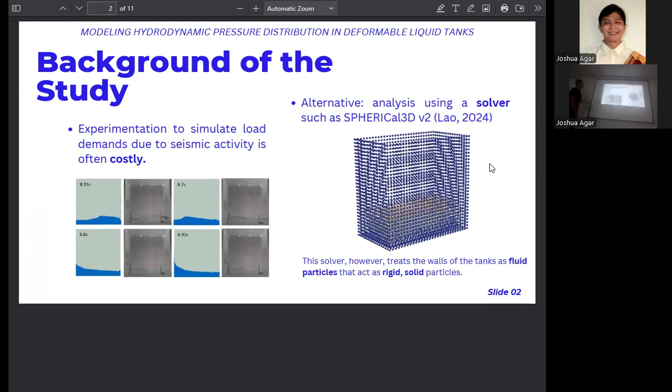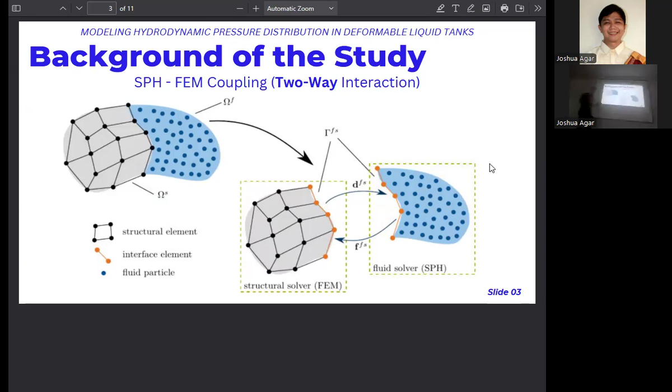Next slide. My problem statement now is to try to implement a coupled SPH-FEM method, combining the two methods in order to compute the hydrodynamic pressure. Comparing to the previous study, there was no tank deformation—it was only a one-way interaction, where the fluid impacts the boundary but the boundary does not impact back. So my framework now involves a two-way process in which both elements interact.

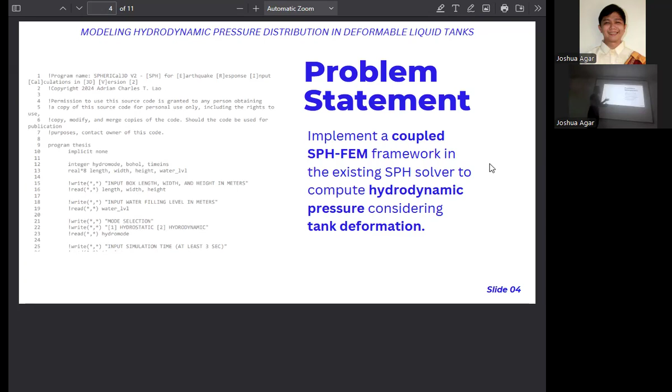What I've modified compared to the previous meeting—last presentation had many objectives, but I distilled it into 3 main objectives. First is to develop a coupling mechanism to find an efficient way for SPH and FEM to interact. Second, once that's coded, I will validate the results using the same experimental data used before. Finally, after validation, I'll try to simulate sloshing in rectangular tanks. So I'll be limiting my study to rectangular tanks—I remember last time I included cylindrical tanks, but this time I decided on only rectangular tanks.

Next slide. Significance, of course, includes better tank design and safety assessment.

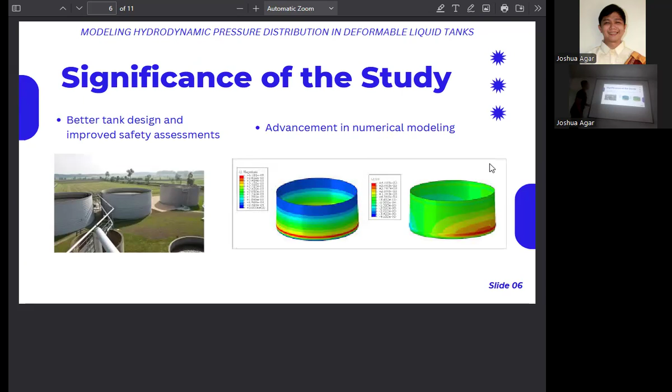Next, I also modified my conceptual framework. I've added the coupling mechanism, which is an important part of the entire research study. The one highlighted in yellow is what's actually in the research, and the ones shaded in white are other concepts that are unrelated.

So, mesh-based approach will be used for the solid model, that's for the boundary of the tank. The liquid model will use SPH—that's a blunder, it's supposed to be mesh-free. Anyway, I'm going to focus on a coupling mechanism that involves two-way coupling instead of one-way coupling, which was done in the previous research.

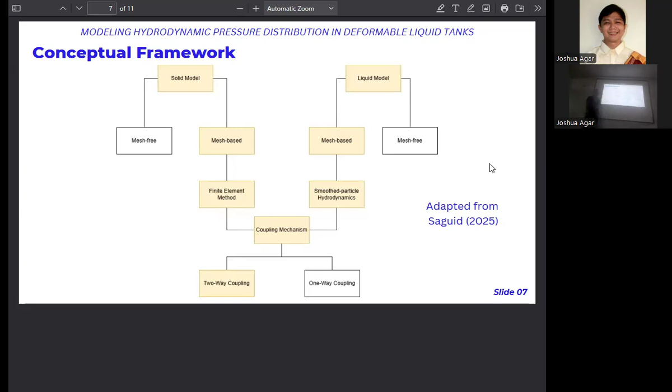Scope and limitations: I'll be using ANSYS for FEM. For SPH, I'll just be using the code by the previous researcher, Engineer Lao, and doing some modifications to allow ANSYS to work alongside that code, making the coupling mechanism possible. And as I said earlier, it's only for rectangular tanks, and in addition, we're just going to work with water, not other liquids, for the liquid storage. For review of related literature, not too much has been added.

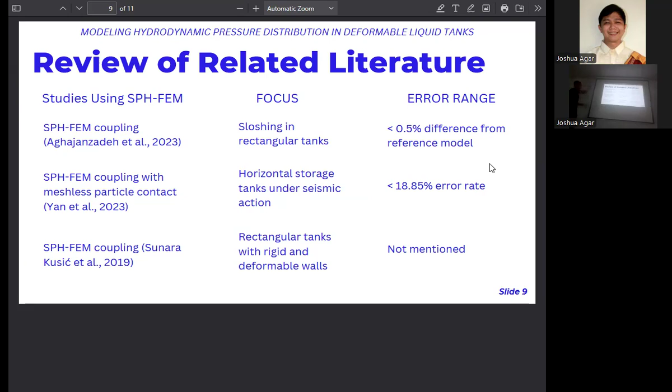What I did throughout these past weeks was sort of just distill all of that, what was contained. Next slide.

Thank you, Mr. Agar, for that presentation. Now you're in the hot seat, so if you have questions, feel free to raise them. It's actually highly recommended for you to compare notes on how it's presented compared to how we will present, so at least we have an idea how to present or make an effective presentation. For the Q&A portion, we'll have around 6 minutes. Fortunately, we don't have that issue much, the senior faculty, I'm just slightly sick.

Let's begin by having your audience appreciate the research objectives. What I would recommend for your presentation is to include what is sloshing. If we roll back a few slides to your objectives, you might as well relegate this to the left-hand side, with the photos on the right to illustrate what the copy is about.

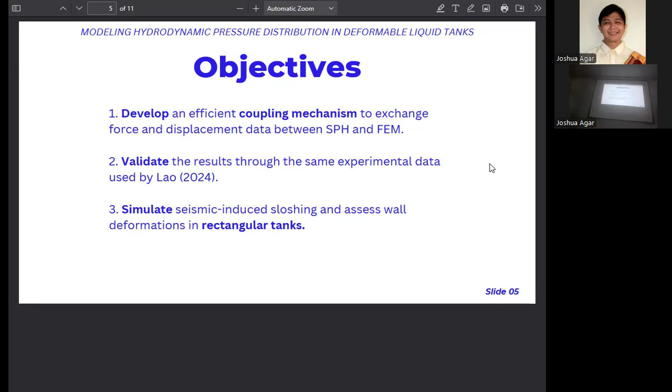And my main worry for you is this part, when doing your scope and limitation. You have two different software - you have SPHERICal3D which runs basically on Fortran, but ANSYS and LS-DYNA are essentially closed form software, closed source, you can't access the code. Have you already explored provisions within ANSYS where you can make your own solver?

I've tried searching some FEM software in such a way that it's possible to call the software from the SPH. SPH will first generate values - that will be the input for the FEM, and in response, that will be the output.

So, are you talking about an API? I'm not sure, I'm not very familiar with the terminology, but it's sort of like two-way, they are able to interact.

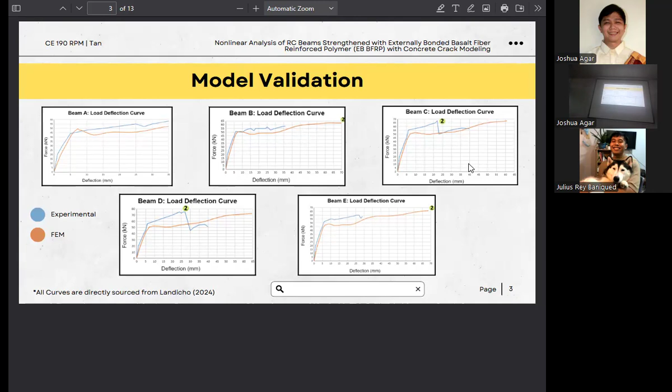He actually used experimental values that he searched from a source and used his own FEM software as comparison. As you can see here, in the elastic region he basically captured the experimental values, but when it comes to plastic behavior it doesn't quite merge. In the experimental data it dropped here, most likely because cracks form and the failure is sudden. He didn't consider that and only considered plastic deformations, which he also included in his scope and limitation.

Next slide. In relation to that, I'm going to introduce the concrete crack modeling to bridge that gap, using his elastic region and connecting this non-plastic region, so that together his study and my study can both validate the one he used as validation.

Next slide. So here are my objectives - first, obviously, is to continue the study of Engineer Landicho.

Next is to determine the crack initiation and propagation and the fracture patterns on a 4-point loading test, and determine how the shear span to depth ratio of the beam affects the cracking results and the cracking patterns. So I will be using that and validating it against the results of Engineer Landicho and the one he used to validate his own as well.

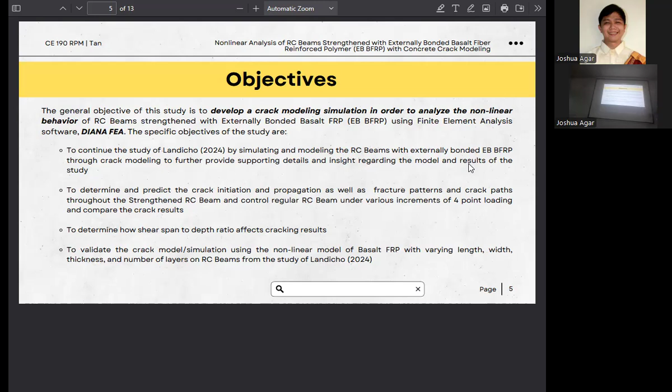So the significance of the study, obviously, we don't need to waste more materials in experimental tests. It also helps determine the optimal placement of the BFRP sheets based on the crack propagation and crack path. And it helps anticipate where the beams actually fail, which is critical so that we can take preventive measures.

So the scope and limitation is I plan to actually use discrete crack modeling approach instead of the smeared one, because discrete crack modeling basically answers all my objectives for the crack patterns and crack paths, instead of smeared, where it just gives me a distribution of the stresses.

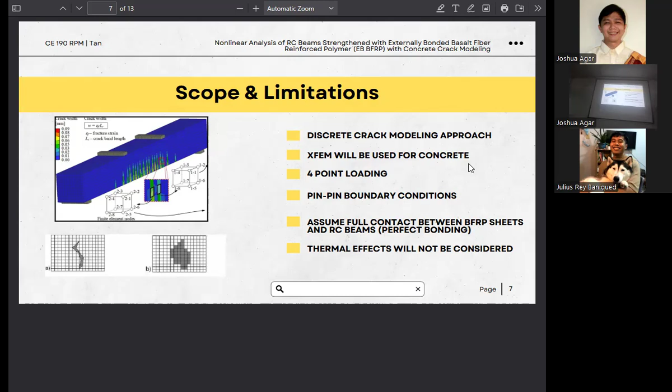So I plan to use extended XFEM for the concrete itself, and I will use 4-point loading. I assume that I will still be using pin-pin boundary, and I will also assume that the bond between the BFRP and the concrete is perfect, so the failure mechanism will not be debonding. I will also not consider thermal effects.

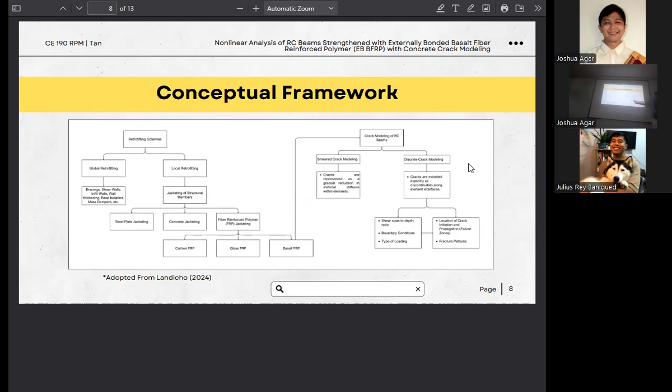And for the conceptual framework, basically this is adopted from Engineer Landicho, and I will be modeling it using discrete crack modeling, and I will be changing these parameters, most likely the shear span to depth ratio, but keeping others constant to change the location of the crack and the fracture.

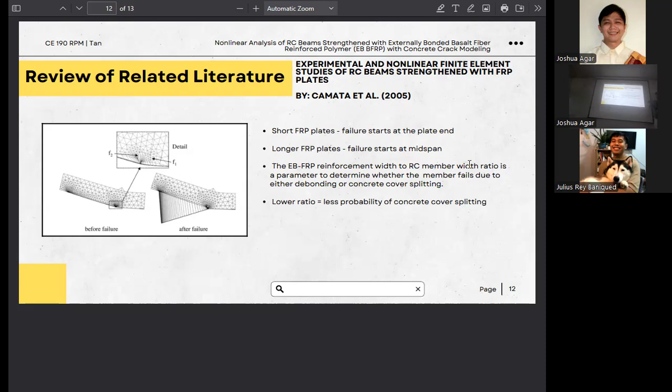And lastly, this one basically states that a lower width of the sheet relative to the RC member lessens the possibility of concrete cover splitting. So I will try, as much as possible, to lower this so that the failure mode won't be debonding, since I assume that debonding failure is not a failure mechanism in my study. So that's it, these are my list of references.

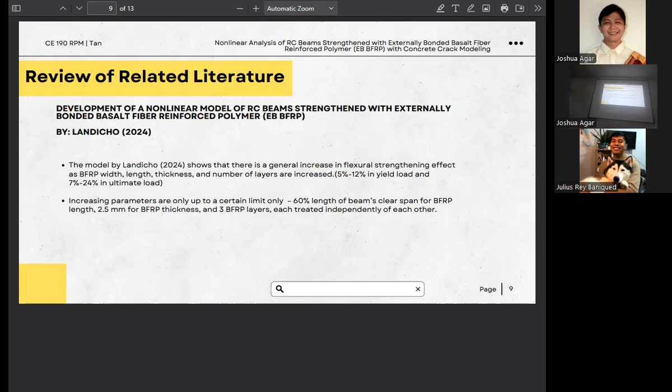Good day everyone, my name is Joshua Agar, and this is my report on my study: the prediction of net pressure coefficients on low-rise gable roofs with single dominant opening using artificial neural networks. My advisors are Sir Carlo Coleria and Sir...

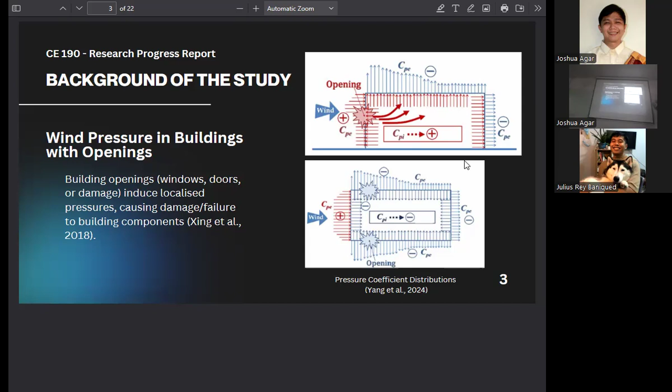So this is what we'll be going through with my presentation: background of the study, why. Building openings induce localized pressures, caused by the interaction of external and internal wind pressures, or simply put, net pressure, which cause damage and or failure to vulnerable building components.

In summary, CFDs and wind tunnels, the traditional methods, have already covered external and internal pressures. When it comes to ANNs, external pressures take focus.

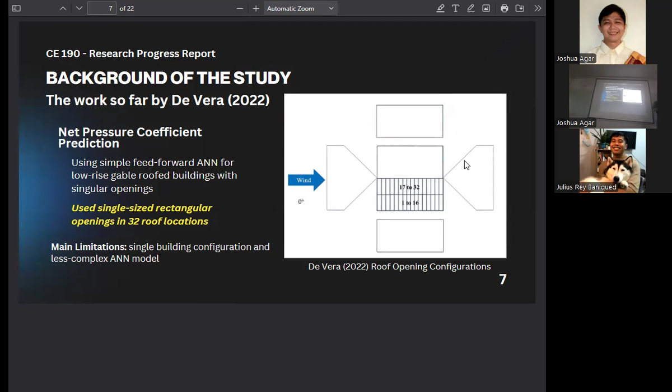This is where my predecessor came in, making use of simple feed-forward ANNs to predict net pressure coefficients using single-size rectangular openings in 32 roofing locations. However, what is not included in the scope is the variation in opening geometry.

Yes, he was able to account for the variation in location. However, studies show that internal wind pressure is not only affected by its location, but also its geometry, or rather its shape and size.

So this is where the problem statement comes in: current research on the application of ANNs in predicting net wind pressure coefficients is already proved to be a viable option, however current researchers have yet to consider the variety in geometry.

In order to address this, I plan on developing a new ANN model to predict the net wind pressure on low-rise gable roofs over varying roof slopes and opening types.

To achieve this: one, first obtain wind pressure data using CFD simulations; two, determine the best ANN architecture; and three, assess its performance by comparing it with literature.

If successful, we should have a more generalized model for net pressure coefficient prediction. Moreover, it becomes an accessible method for predicting wind loads, and it could also serve as an aid in preliminary structural design and DRRM strategies.

For the scope and limitations, I will also be adapting it from De Vera's study, wherein he limited his analysis to isolated low-rise gable roofs, and wherein building flexibility and leakages are neglected. Moreover, for CFD simulations, I will be making use of literature to validate its data.

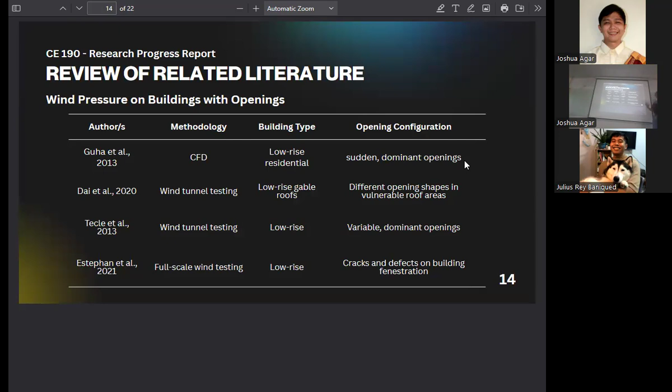Just a quick rundown of their findings: single dominant openings produce coefficients ranging from 0.69 to 0.98. They also observed significant transient overshoots, and that some design codes are found to be underestimating the internal pressures.

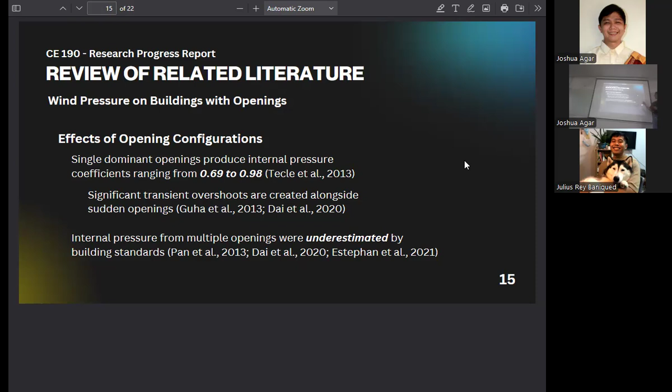Lastly, for the application of ANNs, I have listed them earlier, but mostly they make use of different types, also varying input variables and output. As I said, mostly focused on mean or external, whereas De Vera's is net. And of course their performance shows that ANNs are reliable or viable in predicting such pressures.

Let's skip that for now. And those are my references, and thank you very much for listening.

Thank you, Josh, for that presentation. Perhaps I would like to ask the audience if may tanong, kasi somehow I'm barred from commenting dahil ako po yung adviser. Wala? Sige, pero ito tayo sa slide mo, nagagamit niya yung CFD.

Nagagawa na yung lahat.

Why do we need to do it? I see. So basically, what is the purpose of the ANN? The motivation, even from previous researches, is the speed. Now, I'm not saying it's bad to use CFDs or wind tunnel testing, but we're looking into the application of those results, the application of experimental data into further usage. So that is where ANNs come in.

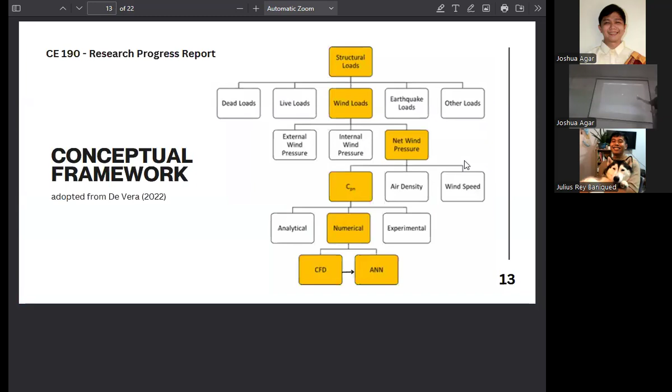Or rather, in the review of related literature, I expect it to perform similarly to de Vera's since we have a similar, what do you call it, training data set. So I would say probably around the higher 0.9 regions, but I still can't give a specific number for now. But given the performance of other studies, we can expect it to be as high as this.

As for his final question: what are the scopes and limitations? Maybe I'll try to expound on that too.

You should already work on that because it's part of, in relation to the second question. And after your midterm presentation, when you derive or devise your methodology, you should already identify the scope - what will be the increments of your shape, what will be the increments of sizes, aspect ratios that you need to consider so we can know whether the research is feasible or not. So that's what's being asked of you. So far, what do you think will be the scope and limitations of your study?

For now, what's written in my presentation is what I have considered. So I will still discuss the specifics of it with Sir Carlo in our upcoming meetings.

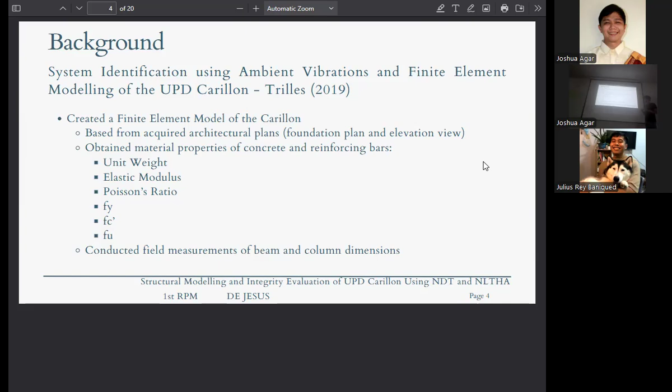So these are basically the findings of his research. Afterwards, he created dynamic testing on the tower, where he laid out accelerometers which measure the frequencies of the tower, basically ambient and free responses. He also used various modal analysis methods like peak picking, FDD, and others. He later finally tuned this model to adjust certain parameters.

The next following research involves Mr. Lamparas, where he created an integrity evaluation of the tower specifically using NLTHA.

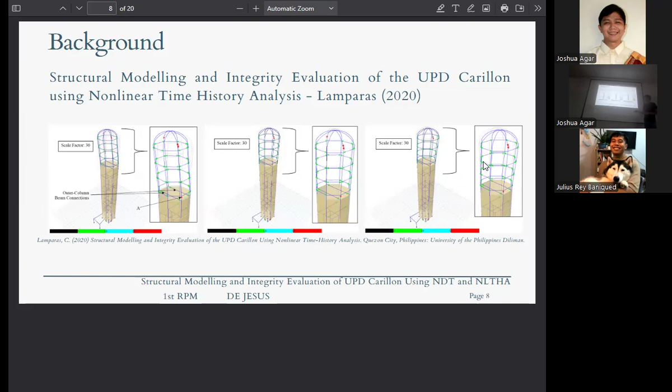These were the findings. Basically, after the simulations, plastic hinge formations formed in the tower after earthquakes. So these researchers were both successful, yet because of the complications, there are still recommendations by them for further research.

So let me enumerate them. Specifically, they mentioned the use of non-destructive testing, which can help in structural modeling. So in my case, my goal is now to continue the research and apply this missing concept.

So the same problem statement still stands, because the tower, carried as an aging structure, needs a reevaluation of structural integrity to determine potentially damaging threats. With this problem, I created this main objective, and I have enumerated some objectives to answer.

First is to apply non-destructive test methods. Second, to reperform the nonlinear time history analysis and earthquake simulations, similar to Lamparas' figures, and compare these newly obtained results to the previous findings of this past research.

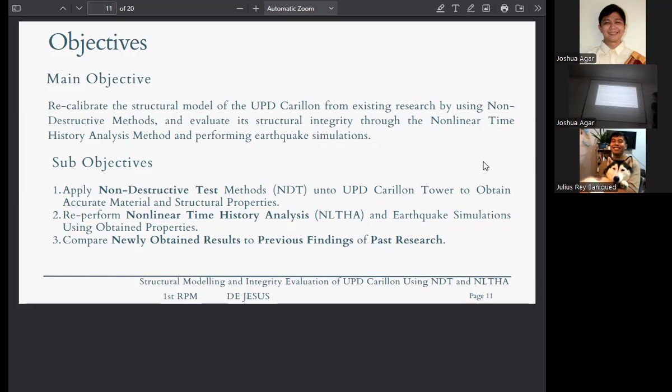For the significance, this research is important so that it can help detect potential risks, and in the event of future earthquakes, it is necessary to determine the system response. Also, by continuing this research by Trilles and Lamparas, you can help develop a framework in promoting structural health monitoring in different groups. In fact, in UPLB there's also a similar structure. Also, by performing NDT, it can help determine actual material properties.

For the scope and limitations, the only thing that I will add and explore is adding non-destructive testing methods. I will still use the finite element model created by Mr. Trilles and use similar computations to Lamparas.

For the conceptual framework, I have based this on the previous studies, but I still highlighted these three concepts and added more on non-destructive testing methods that I could have possibly researched so far.

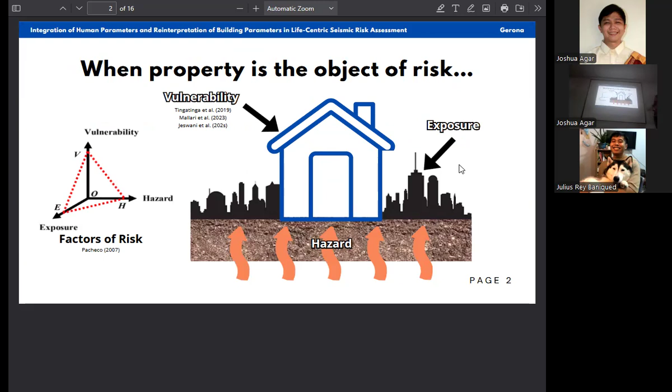So risk is the product of three factors: exposure, hazard, and vulnerability. When property is the object of risk, the characteristics of the property, or in this case the structure, is the vulnerability. But when life is the object of risk, life is the vulnerability, and the building becomes a hazard.

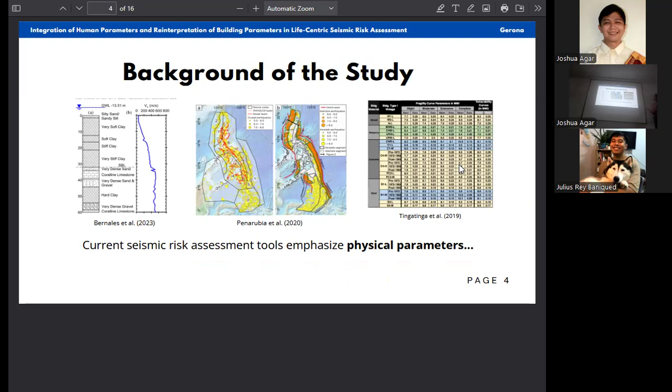Current seismic risk assessment tools emphasize physical parameters such as the soil type, the placement of the faults, and even the building parameters—wood, materials, the structure type, the height of the stories—and the estimation of potential economic losses, which are in this case cost and time.

The identified problem with this is that current seismic assessments focus on physical and economic losses instead of the impact on life, inducing disaster inequity or injustice, which affects vulnerability.

The points to support this are the incorporation, or secondary consideration, of social vulnerability parameters—the literature supports that. Another point is the consideration of the building parameters as vulnerabilities instead of hazards. And then the importance of governance and justice

in economic assessments of risk, since when the assessments of risk are focused on the economic side, such as cost, then it will favor high-value residential areas. So those are not the sectors that are needing support after disasters.

So the general objective of this proposal is to develop a tool to estimate seismic risk on life. The specific objectives are going to answer the supporting arguments of the problem.

So this considers social vulnerability parameters in the assessment. Another is to redefine the building parameters, which are initially vulnerability parameters, and to analyze the effect of prioritizing—changing the objective of risk from property to life. How will it affect the assessment?

So this study aims to contribute to disaster risk reduction management projects with the emphasis on vulnerable sectors.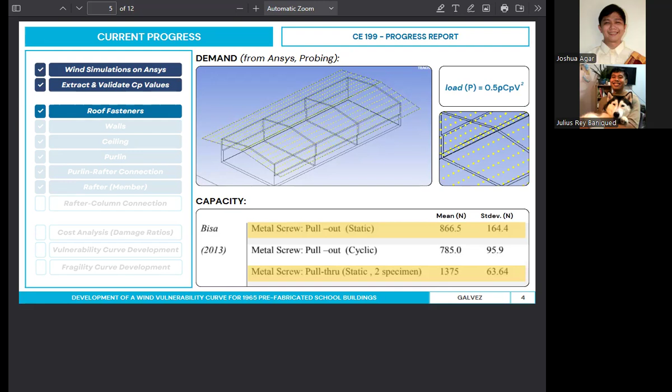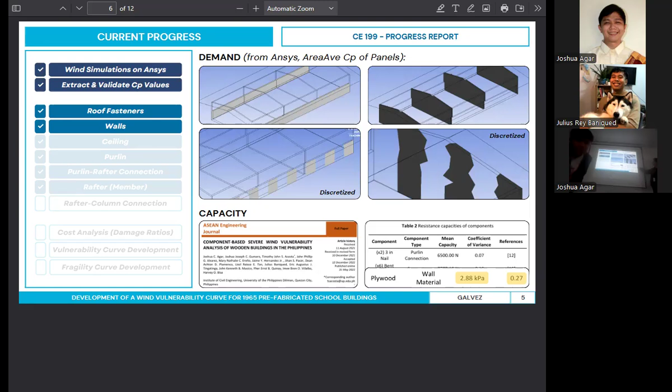And then set up ako ng Zoom. And then next slide, so for wall demand, same principle lang din. So using ANSYS, nag-set tayo ng discretized walls. So dito sa mga area na to, kukuha ng mga CP values, so area average, sa mean and standard deviation na randomly generated using Excel. So, mean versus capacity, so comes there.

And then for ceilings naman po, so same principle, next slide. Same principle lang din as well. So, bale, for each discretized panel, kukuha ng area average value, with two load which are randomly generated using mean and standard deviation. So, moving on to next slide.

So, ngayon naman, for the beams, mas nag-focus tayo on using ETABS. So, bale sa beams, kumuha tayo ng mga area average CP value throughout the envelope ng ating structure. So, from area average, kinonvert natin to CP, kinonvert natin to load. So, area loads na po yun. And then, parang kinonvert po natin siya to line load.

So, based on tributary width. So, yun yung parang naman sa roof. Para naman sa walls mismo, pwede naman siya wall na lang. So, the reason why we did that is parang my advisor and I found it na mas accurate kasi sa panel na lang din nasa room. So, ganyan siya. Although it's a bit longer, it's a bit more accurate daw po.

So, as per that, yung demand, since nakalatag na yung mismong load, makakapag-extract na tayo ng mga internal forces within the member. So, shear, moment, flexure action, ganon. So, makakapag-extract na tayo. And compare na natin sa mean standard deviation based on Monte Carlo.

So, next slide. As for screw fastener connection, so same principle lang din po, using same structure, same loads, nakalatag na. Extract na lang tayo ng demand from ETABS, so P which is axial, and then V2 which is shear. And then compare natin sa pull-out capacity na galing sa research paper. Then yung shear tensile combined action and shear, galing naman siya sa AISC concept.

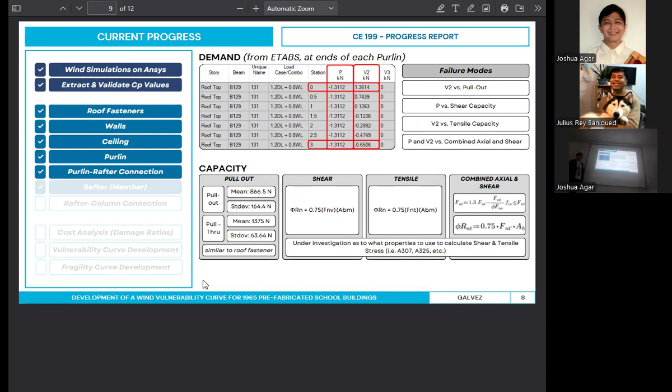Siguro in relation to that, part of fragility curves is identifying yung damage states. How are you planning to identify yung overall building damage state? What you only have in the case definition is yung per component. Sinabi mo na roof, wall, window, may separate silang damage rate, parang damage state, pero you want to identify na isa lang, unified for the whole building. So nabring up na po siya sa akin how do I plan for overall building. At may recommend po sa akin ng previous study, may damage state definitions siyang nahanap para sa overarching building. So I guess titingnan ko pa lang siya kasi I haven't really gotten it. Please include that sa midterm para malaman, masagot din.

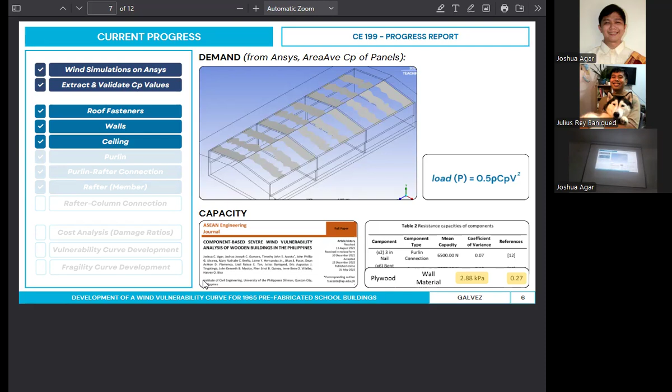Today we're talking about stress-based shape optimization of non-prismatic beams in isogeometric analysis. Good afternoon, everyone. I'm Iñigo De Leon, and my advisors for this thesis are Sir Carlo Colegio, Sir Alvin, and Dr. Eric.

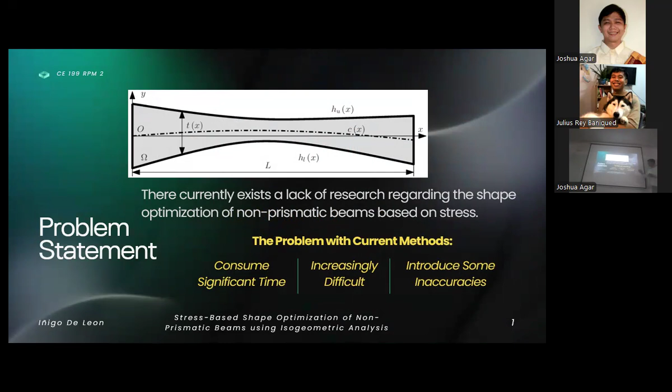I want to remind everyone that there currently exists a lack of research regarding the shape optimization of non-prismatic beams based on stress. And although current methods exist, they either consume significant time, are increasingly difficult to execute, or may introduce inaccuracies in the results attained by the model.

This thesis aims to develop a tool and procedure for the shape optimization of non-prismatic beams using isogeometric analysis. Specifically, we aim to develop a 2D IGA tool capable of computing displacements and internal stresses, verify the performance of the tool, apply it to different cases of non-prismatic beams, compare the optimized shapes based on stress versus displacement-based optimization, and finally, properly document the tool so future researchers can use it.

So how are we going to do this? We start by modeling, which leads to the development of the 2D IGA tool. While this is happening, we'll be collecting results for its verification. Once the tool has been developed and verified, we can move on to developing the shape optimization algorithm, which we'll apply to the different cases mentioned, and then compare those results with those attained via displacement.

Currently, we're done with the modeling and the development of the tool. We've collected results and verified the tool, which leaves the optimization part to be next.

From the last RPM, I mentioned that I coded the practice FEM tool, and I've gotten into contact with the previous researcher, Mahamba. In the month since that RPM, I've been able to code an IGA tool that computes not only displacements, but also strains and internal stresses, and importantly, the von Mises stress, which will be used for the optimization procedure.

I verified the tool with results from a sample problem given by Sir Janiva's thesis, as well as a sample problem from Chandra Sekhar et al. Finally, from that sample problem, I've been able to visualize the stress results in a separate visualization software known as GID.

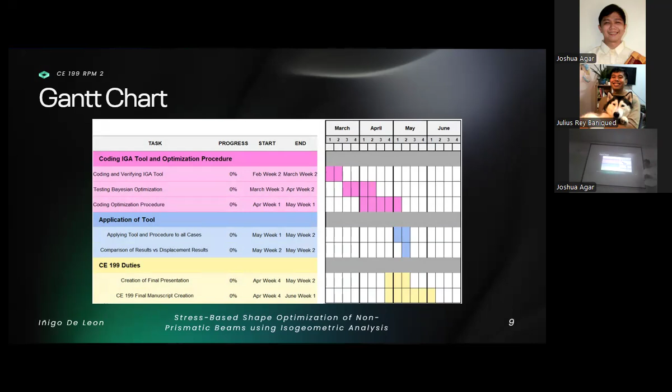Currently it's the 3rd week of March, so I'm done with the IGA tool. I'll be testing Bayesian optimization and coding the optimization procedure throughout April, so that by May I can focus on creating the final presentation as well as the final manuscript. Thank you for listening.

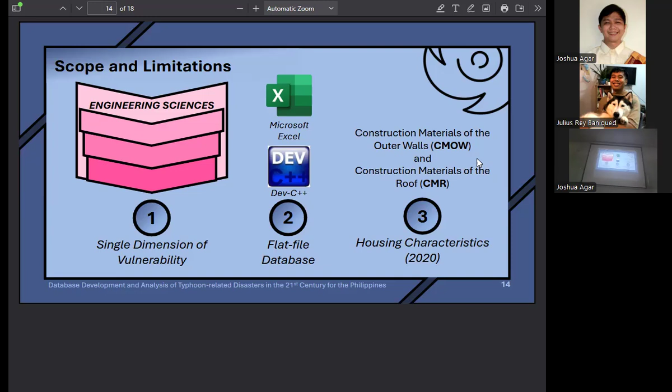For my scope limitations, I focus on a single dimension of vulnerability within the engineering science perspective: the physicality of the housing structures. I am articulating a flat file database using Microsoft Excel, and using C as the programming language, with C++ for the application. Housing characteristics were obtained from 2020, specifically the construction materials of the outer walls and roofs of different housing structures.

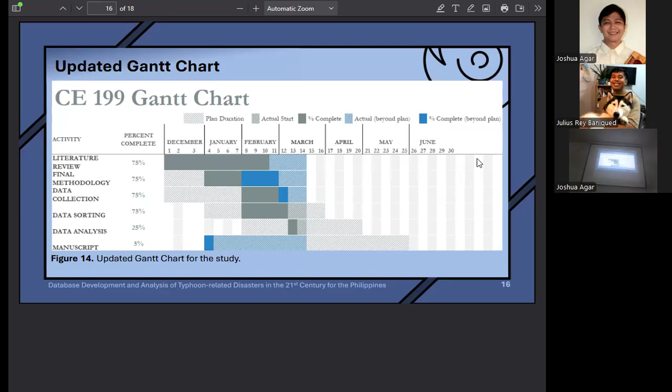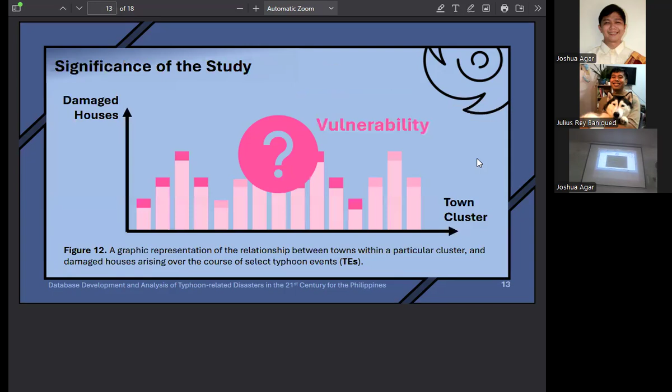Another comment is about your conceptual framework. You may have heard the discussion about whether that is really a conceptual framework. What do you need to work on here? Use this Q&A time for an explanation of how you would reframe the conceptual framework — what are the related parameters, in your own words?

For me they are related, sir. Yeah, what are the concepts at hand that you are using or covering in your study?

So there are two main independent variables: the totally and partially damaged houses, which come from the Philippine Statistics Authority, published every 5 years. That seems more like a methodological framework — how do the variables you identify interact with one another? That's a different concept — if you were to map your study, where would you place it, what are the involved concepts and topics?

Well, vulnerability is the main concept involved in the research — specifically physical vulnerability.

So for the disaster risk, the overall goal is to reduce disaster risk. Within disaster risk, there are many components, so there's vulnerability, and then the physical aspect of vulnerability.

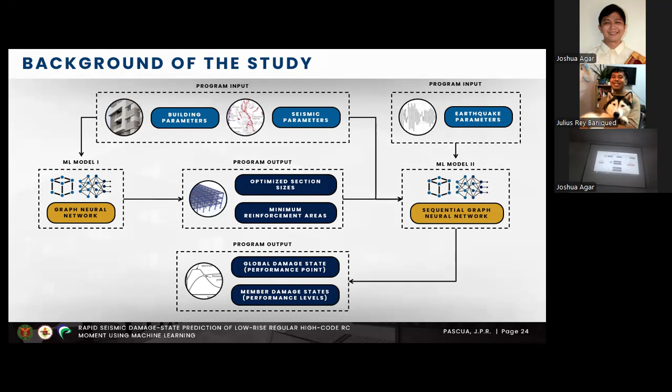With that, there comes the necessity for a supplementary machine learning model, a graph neural network, that can transform high-level user inputs into more specific structural information. From all that information, we can feed it into our primary ML model that will give us our global and member damage states.

With that, we've restricted our structures to residential occupancy. Here are the updated input parameters, consisting of building and seismic parameters, and the updated modeling parameters, which we deem reasonable for our updated occupancy type.

For our progress, we updated a program for stratified random sampling. Our strata contain all combinations of number of stories, number of bays in the short and long direction, as well as the story height. Within those strata, we randomly sample the following continuous variables.

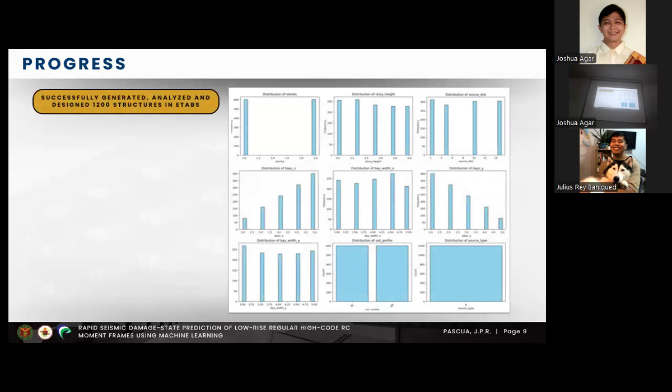We stored the information into the following files, and I've generated an API program that automatically generates, analyzes, and designs a number of structures. I've designed 1,200 structures so far, and here are the histograms of the different variables.

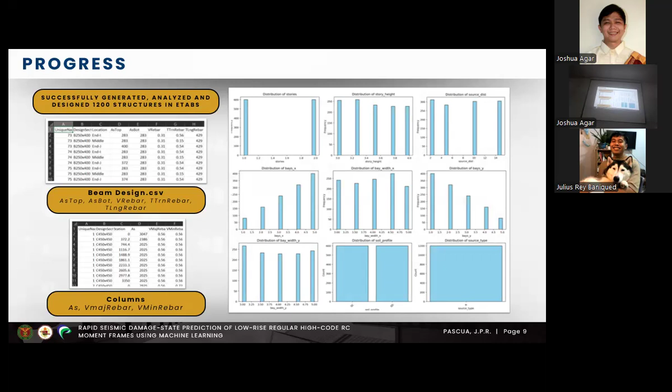I've extracted the following design information per beam and per column, which will be our output for our first machine learning model. Under data processing, I've developed a file format containing input parameters and design results to organize the pertinent information associated with each structure. Finally, I've developed a system for indexing members for later calling into the output program.

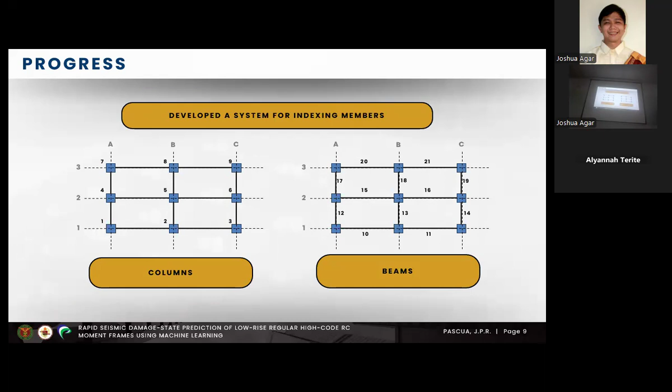With that index of members, I wrote a program that can identify or derive a member's spatial info based on its member ID, for both columns and beams.

We're in the third week of March, and before next week, or hopefully by the midterms, we aim to present the updated architecture of our first model and print results. So that's all.